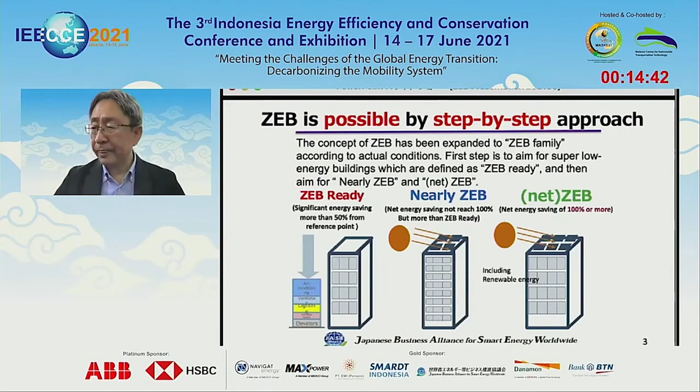In order to promote awareness raising and sharing of experience and know-how on ZEB in ASEAN countries, we have been conducting several activities. Our organization supports those activities, and it consists of public sector and private sector members. Since 2017, we have invited people from ASEAN countries to Japan for a training program about ZEB.

Since last year, we are organizing online seminars because of the COVID-19 pandemic. We have activities in Vietnam, Malaysia, and Indonesia also.

And in Japan, in order to promote ZEB, we published pamphlets and design guidelines. And in order to share knowledge and know-how, the ZEB design guideline in English is also available. If you want to see our pamphlet or guideline, we have an English version translated from Japanese, but it might be your reference.

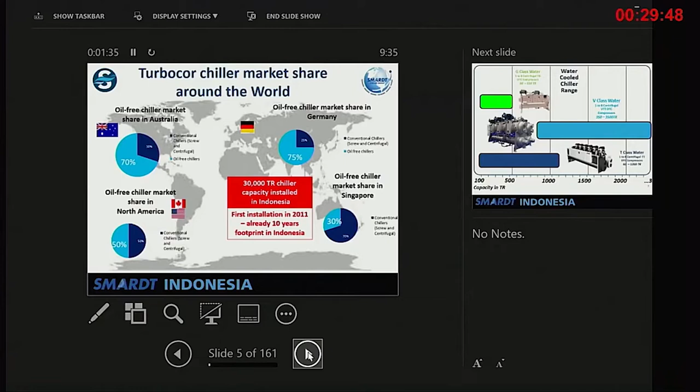The global market share of Turbocor oil-free chillers has increased dramatically, predominantly due to the efficiency that they provide. The product range of the chillers is continuing to grow, with larger and larger chillers available as oil-free chillers. We also now offer these models with low global warming or no global warming potential refrigerant, which is becoming increasingly an issue with Kigali now in place.

Water-cooled chillers, typically, you will find have multiple compressors if they are from SMARDT, if they are oil-free, whereas conventional chillers have only one large compressor. This, besides the energy efficiency, provides one of the key advantages for our chillers. Since the compressor is the one critical part on a chiller, having multiple compressors simply gives you redundancy, as well as the ability to unload into low loads, so more operational flexibility, which is very, very important.

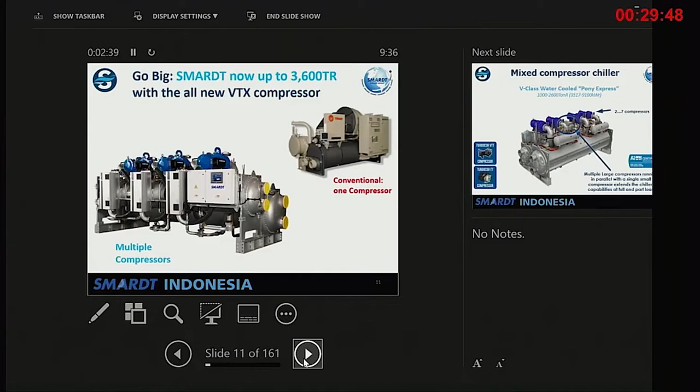What we also do, which is quite unique, is we can mix our various compressors on one single chiller to provide a very specific machine for your load requirement. Typically, this means that we add one small compressor to a large compressor chiller to be able to achieve very low loads or bridge gaps in our performance profile with this particular compressor type.

We also offer air-cooled chillers. I am actually very supportive and pushing air-cooled chillers, especially in the Indonesian market, because despite the general acceptance that in Indonesia one should use water-cooled chillers, the efficiency of our air-cooled chillers is really fantastic, because Indonesia's climate isn't actually as hot as many people imagine.

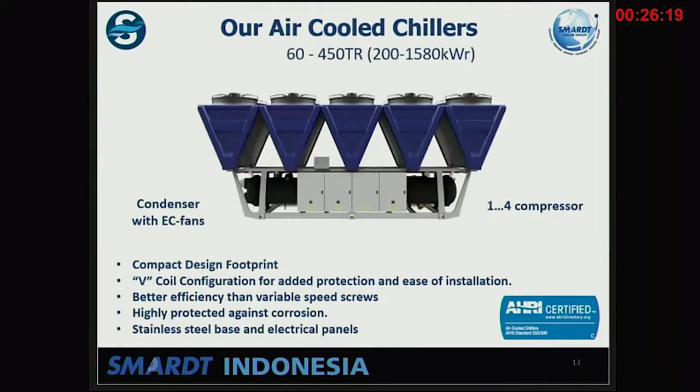As such the performance is very good, and you get rid of all your water-related problems. Specifically on this issue, we'll be hosting a virtual plant tour right after this presentation at 10 o'clock, where we present our chiller plant retrofit replacement project at the L'Oreal facility in Jababeka, East Jakarta, where we replaced a water-cooled chiller plant with air-cooled chillers, and found that not only have we saved the plant 20% of its total water consumption, because cooling towers used for water-cooled chillers are very water consuming, but also save them energy, changing from water-cooled chiller plants to an air-cooled chiller plant.

So our air-cooled chillers are really fantastic machines. We see a lot of interest in air-cooled chillers now, especially from data centers, which do recognize that water supply is a major issue. And as they do very detailed energy modeling, they also realize that the energy penalty supposedly for air-cooled chillers isn't actually that high at all with our oil-free air-cooled chillers.

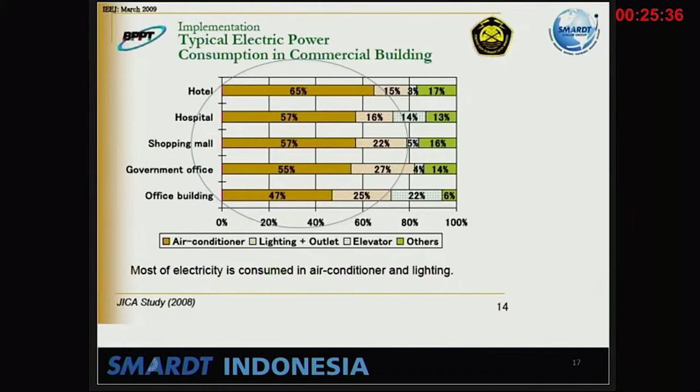Now, in Indonesia, why are we at this energy efficiency conference with chillers? Well, because cooling is by far the largest single electricity consumer of buildings in tropical climates like Indonesia. In a typical building, you can simply say that some 60% of the total electricity consumption is the HVAC system. And of that 60%, the vast majority, 80%, is the chiller itself.

PLN electricity prices have increased since we've entered the market, and as such, electricity bills are a concern to customers. We have seen quite a bit of interest in saving electricity, and typically this means with a smart chiller plant, with an optimized chiller plant, you can reduce your total electricity bill by 20 to 30% of the total bill.

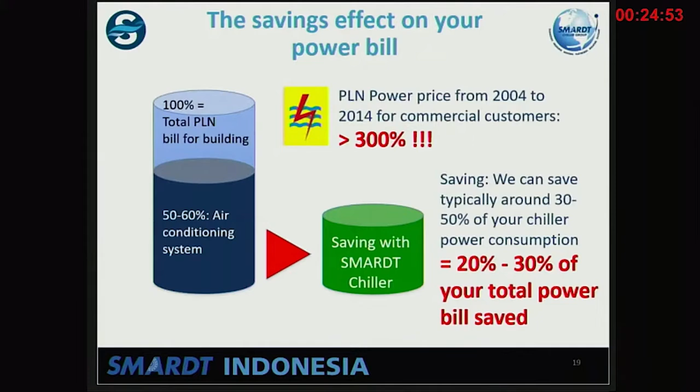What is important, as with most energy efficiency technologies, the initial cost is just a small part of the picture. Yes, our chillers are slightly more expensive, simply because we have multiple compressors on the machines. As such, we cannot offer the same prices as machines with just one compressor. However, the operating life of a chiller isn't 3, 4 or 5 years, it's 20 years.

So over this very long operating life, the efficiency advantage far outstrips the disadvantage of a slightly higher capex. And overall, we'll see typically paybacks or break-even points at some 1 to 3 years, and return on investments often over 1,000%. So energy efficiency with SMARDT chillers is one of the best investments anyone can make, especially in these times of tight markets, of economic downturns due to COVID.

Energy is something you consume in any case. A chiller is something you need to use in any case. This is a certain way to improve your profitability.

Now, I'm going to talk a little bit about the specific load profile where the SMARDT chiller is very appropriate to use. What is important to remember for cooling loads for buildings is that they are critical, right? Critical cooling load means that the equipment needs to be sufficiently large to cool your building for the worst case condition.

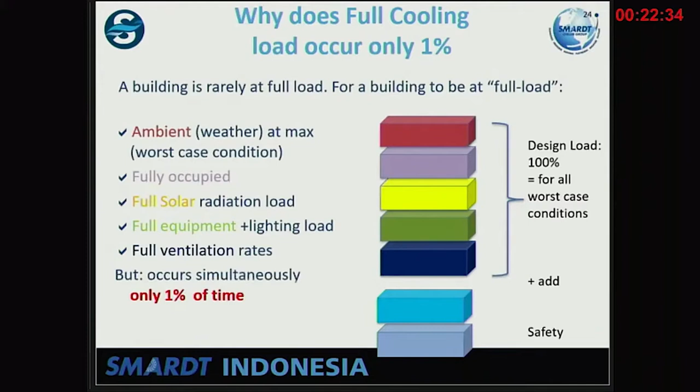The worst case condition is full sunshine on the hottest wet bulb day of the year, and full occupation, which means full ventilation rates, full internal equipment running, and on top of that, backup and safety factors. So all of this leads to a large block of potential cooling demands, which, however, occurs only very rarely together, because all these factors together happen maybe 1% of the time. So your design load is a maximum cooling load that you hardly ever need to reach.

What does it mean for the chillers? For the chillers, it means that your chillers will typically run in partial load. Not at 100%, but the vast majority of the time they run in partial loads. This is important because that means your machine needs to be efficient at partial loads, because that's where you use it 90% of the time.

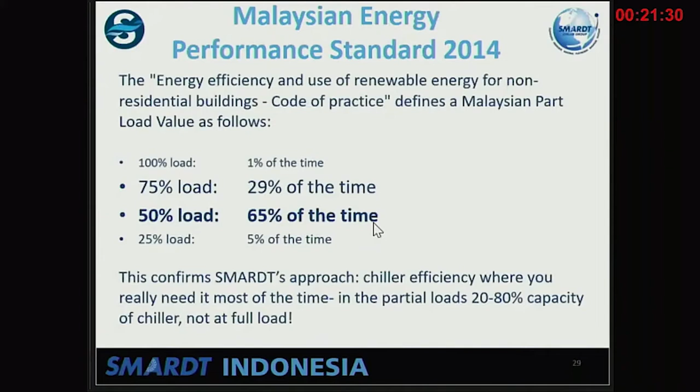However, most chillers are designed exactly the opposite way around. The Malaysian Energy Performance Standard, already issued in 2014, recognizes this very much. It actually says 50% load, as in partial load, will occur 65% of the time. So what they're wanting to say with this is look at the efficiency of chillers at these load points, not at 100% load points. And here with the efficiency curve of the SMARDT chiller, you can see that our efficiency is actually improving the more we unload the chiller.

So at 100%, our efficiency is good, but it's not necessarily better than a conventional chiller. But where we have a significant efficiency advantage is in these partial loads, and this is where you operate most of the time.

Here is a classic comparison with a conventional chiller. You see at 100%, we're quite similar. Then conventional chillers become slightly more efficient to about 80% and then quickly drop off to become less efficient in partial loads, simply because they have only one compressor, and that compressor cannot unload because it needs to maintain a certain compression ratio for the refrigerant.

Our advantage with multiple compressors is we can unload on multiple compressors. Each of the compressors has a VSD, and as such improve the efficiency down to very low loads. Typically, we can operate to at least 20% with improving efficiency, sometimes even lower.

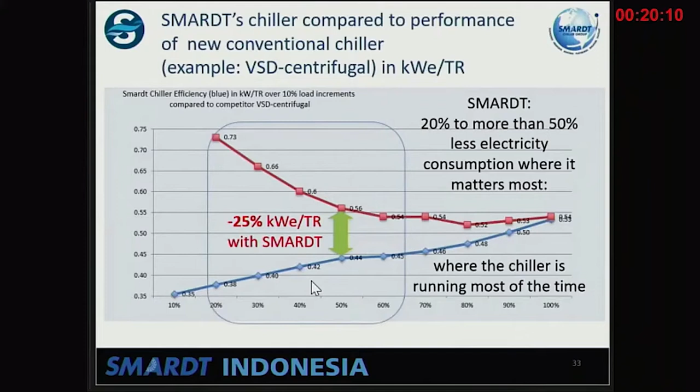The same characteristics, because we use the same compressors, applies also to air-cooled chillers, except that our efficiency advantage on the air-cooled chiller side is even larger.

So you will see here one of our air-cooled chiller plants that has been operating at a resort, a nice 24-hour operation. You see during the day, the efficiency increases slightly to about 0.8. During the night, it improves as low as 0.55, even 0.5. Average efficiency with an air-cooled chiller, 0.65 kilowatt per TR. That is quite unheard of for conventional air-cooled chillers.

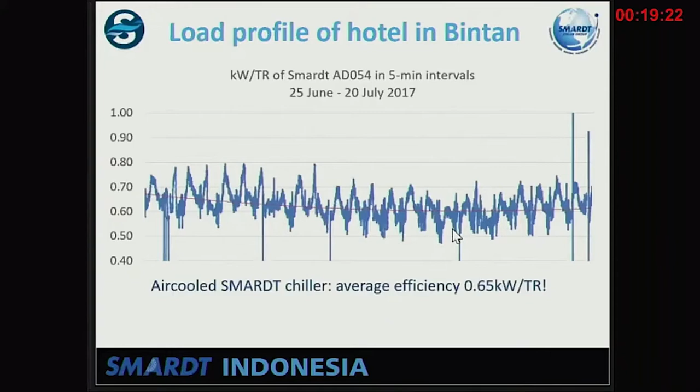Another case study is replacement. This was one exactly at a brewery in Singapore. We had very nice data of the old chiller in red. You see the data points. Very classic confirmation of the efficiency curve for conventional chiller. The more we look into the part load, the worse the efficiency becomes. Look at these efficiencies for the water-cooled chiller. Goes up to 1.6 for part loads, whereas the new SMARDT chiller in green, as projected, the efficiencies improve in the partial loads, overall a 40% efficiency improvement.

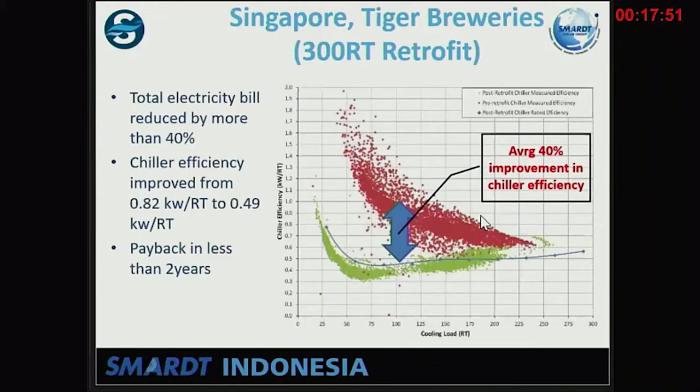As the second advantage of oil-free chillers, simply because we don't have any friction, we don't have any oil in the system, it's much more reliable and has reduced maintenance requirements. And because chillers are very, very heavy-duty machines, this is a very important aspect. Your chiller will run every minute that you open your building, your factory, your chiller will be running. So in many cases, 24/7, 365 days a year. A very heavy-duty machine with the according, typically maintenance requirements.

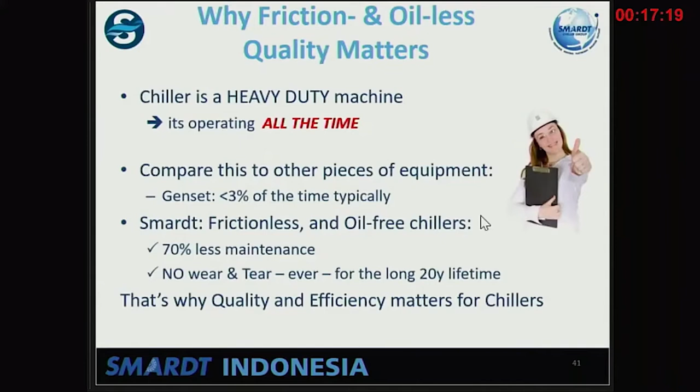However, with our magnetic bearing system, since there is no touch, there is no friction, there is virtually no replacement part on a scheduled basis, meaning there are no consumables at all. Whereas with a conventional chiller, you have to change the oil, you need to do oil checks, you need to change the filters, you have a lot of downtime, you have a lot of costs associated with it, and yet still a high risk of something breaking badly because of the inherent friction of the system.

The other advantage that I touched already on is the multi-compressor setup offers you redundancy. Why is redundancy important? Well, think about airplanes. If you fly over the Pacific to America, would you choose a one propeller machine, or would you feel more comfortable in a plane with 4 turbines? I think most agree that we all feel more comfortable in a plane with several turbines, because we know even if one fails, I have the remaining turbines to fly in. It is exactly the same scenario with the chillers.

The conventional chiller has one compressor. If that compressor fails, the whole chiller is out. With the SMARDT chiller, if one compressor fails, well, we still have the remaining compressors and we've only lost a little bit of capacity.

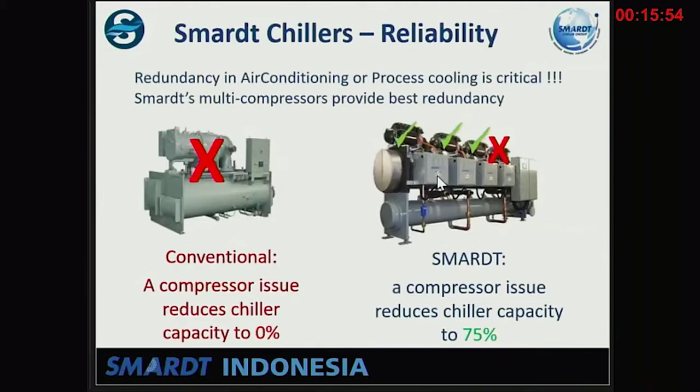We actually have isolation valves on all the compressor refrigerant pipes, and we can even change the compressor while the machine is still running, which is another significant maintenance advantage for critical operations.

This characteristic really allows you to reduce the number of chillers that you install. We are probably the only chiller manufacturer who goes to a client and asks you to buy less chillers. Please consider buying less chillers because you don't need so many. A, our chillers are more reliable. B, they have more compressors. C, you don't need a baby chiller because our chiller can unload into very partial loads, low loads. And as such, you will need less chillers.

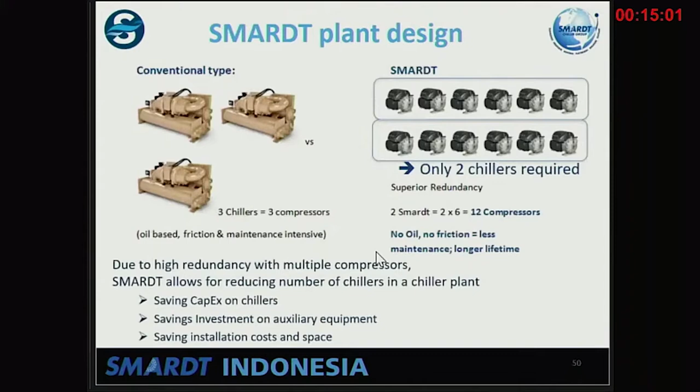Every chiller that you save saves you a lot of money because it saves you what we call auxiliary equipment. Every chiller that is there, as small as it is, needs pumps, needs a cooling tower, needs the accessories of the installation like valves and so forth. Very important electrical capacity that you need to add, including the expensive cabling, space, and the yearly maintenance cost.

So reducing the number of chillers is the number one strategy that we can apply to help you reduce the capex of the chiller plant, and in the long run, yet still be more efficient.

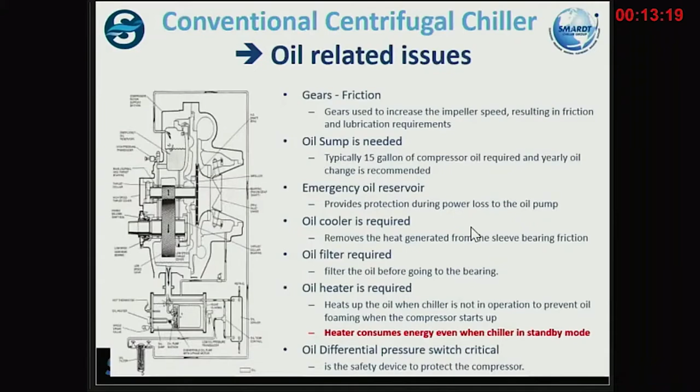The oil cycle in a conventional chiller is really quite a complex undertaking. With Smardt, you don't need to undertake all these maintenance steps on the chiller. In the field, we have seen typically a 70% reduction of maintenance issues, and as such cost reductions, not to mention the associated downtimes. The cost of lubricant is also very high because typically you have to buy it from the supply of the chillers, so a significant advantage there.

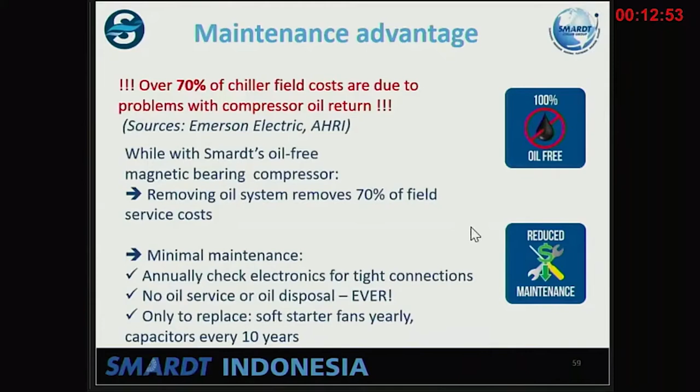Ease of service in small plant rooms can be quite an issue. You see how small our compressors are. Here's one of our technicians working on one open compressor. It is only 120 kilos, so light that actually 4 men can lift it anywhere. It has no oil inside, so it can fly. It is allowed to be airlifted, which means I can get a compressor very, very quickly anywhere.

Whereas conventional compressors are very heavy, several tons. They cannot be airlifted. It is really complex to take them out, to maintain them, simply because of their sheer size and weight.

Another case study in Alexandra Point in Singapore, where the client actually agreed to reduce the number of chillers from originally 4 chillers to just 2 Smardt chillers. So they indeed took up that Smardt chiller plant strategy. The incremental payback on this project was 14 months. In 14 months, break-even was reached. Very, very significant financial benefits from this strategy.

Last aspect I want to mention that is related to oil in the system that a lot of people aren't aware of. Lubricant in a conventional chiller will contaminate your refrigerant. Why? Because the lubricant sits in the compressor, and that is where the refrigerant goes through. Every time the refrigerant goes through the system, it will take tiny amounts of oil, which then will contaminate the outside of your tubes and create a slick film around it, which reduces the heat exchange capacity of those tubes. And because it sits on the outside of the tubes, you cannot simply clean those.

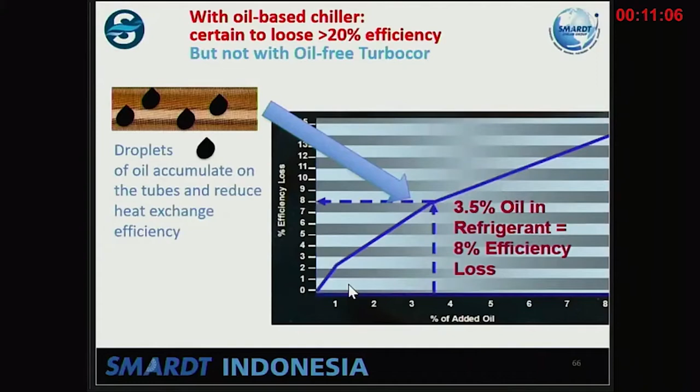ASHRAE's study found that your average chiller had lost 22% efficiency due to this oil issue. With a Smardt chiller, you simply don't have this issue ever. Whereas with a conventional chiller, you buy a machine that you know will become less efficient over time, with a lifetime of 20 years. Why would you buy a machine you know is becoming less efficient, that you have to keep for 20 years, if you can have an oil-free machine that won't suffer from this oil contamination?

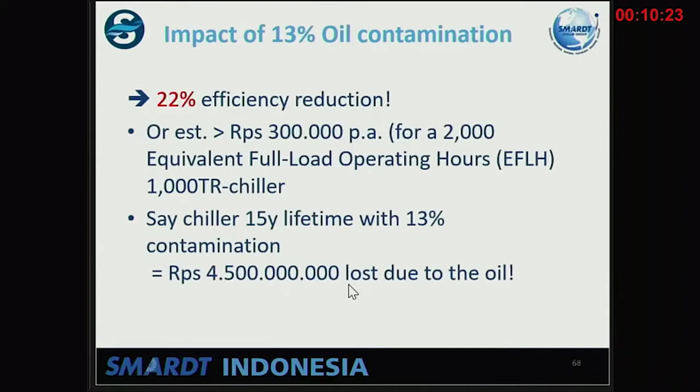This advantage alone of not suffering from oil efficiency loss already pays for the Smardt chiller's slightly higher capex. A couple of other advantages: we have built-in soft starters, fast restart options that can restart the chiller as quickly as 20 seconds, and absolutely no vibration because there is no friction. We typically have the lowest noise of any chillers, and very important, if you're building a new building, our weight is always significantly lower, and the size of our chiller is typically lower than conventional ones.

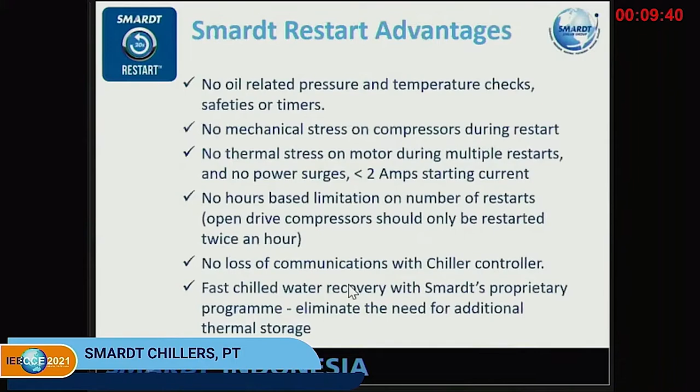Now, I see we have 5 minutes left, so I will jump through these slides quickly to give a little introduction to our CPECS system, our chiller plant optimization controller. A very important aspect to understand: a simple example - even if you buy a race car, say a Lamborghini, top of the line, but put an inexperienced driver in it, you will simply not win any race.

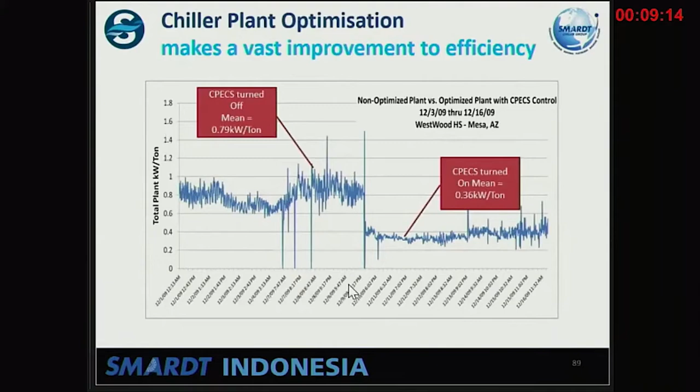It's very similar with the chiller plant. You can buy the Smardt chiller, but if you don't have an optimization controller, the chiller system is a complex system with several chillers having multiple pumps, cooling towers, and so forth. Now, who knows how to run this equipment in harmony with each other at every single minute of operation? No one. The human operator cannot do this quickly enough.

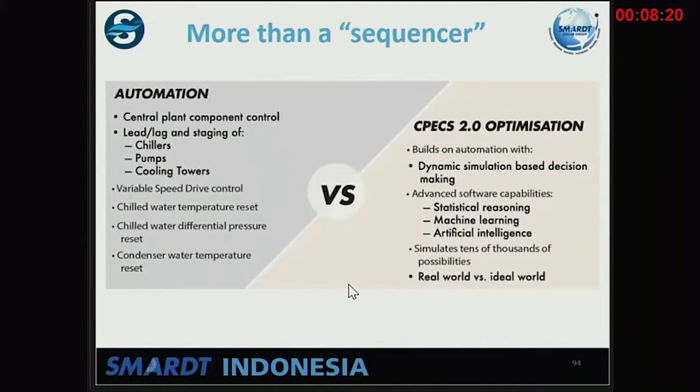So what you need is plant automation, and in an ideal case this is an optimization system, programmed with the characteristics of each piece of equipment to calculate at every single second of operation the most optimal way to run each component of the chiller plant in harmony with the others. The effect: you can save as much as 50% additionally on your energy cost. Your chiller plant will only truly reach the specified top efficiencies of the equipment if you have such an integrated chiller plant controller. Only with such equipment can we really guarantee the best efficiencies, such as 0.55 kilowatt per TR for a water cooled chiller plant.

So a very big impact of CPECS. It is more than a sequence controller. A sequence controller will not get you there.

I have just a few minutes left, so I'm skipping quite a few slides to give a last summary of the advantages of Smardt chillers. Smardt chillers are 100% oil-free. There's no oil-related maintenance cost, and no oil-related equipment at all that can break. We have no frictional losses, and as such the highest efficiency.

We have a very long service life because there's no friction, no startup currents, no noise, no vibration, and most importantly, multiple compressors, which give you the efficiency where you truly need it, the ability to reduce the number of chillers you need to purchase, and the redundancy to feel safe that even if one compressor should fail, it will not impact your operation, because chillers are critical pieces of equipment.

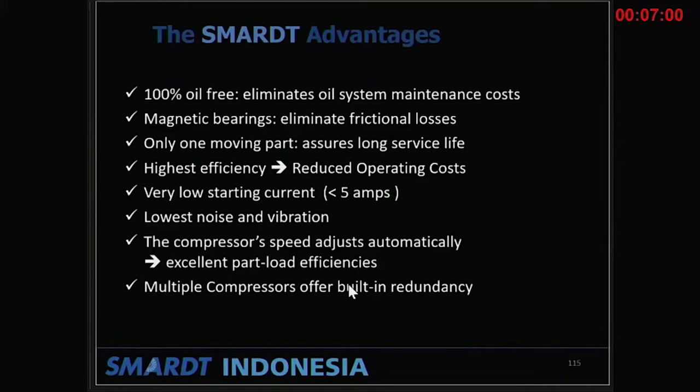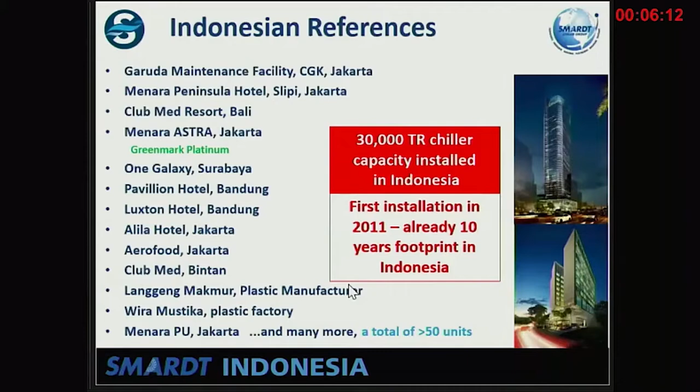Our largest air-cooled chiller plant so far has been in operation since the beginning of this year in Pontianak, with almost 1,500 TR. So it is very likely the largest magnetic bearing air-cooled chiller plant in Indonesia at this stage. We see a lot more interest in these. I invite you to join us for the virtual plant tour we are hosting in just a few minutes, which will show you our air-cooled chiller plant at the L'Oreal industrial facility.

The global setup of SMARDT is with 6 factories around the world at this stage. Typically, our customers in Indonesia choose the Australian factory or the Chinese factory. Our regional Asia office is in Singapore, where we also have a large spare parts warehouse, and obviously we have skilled technicians and the according tools in Indonesia.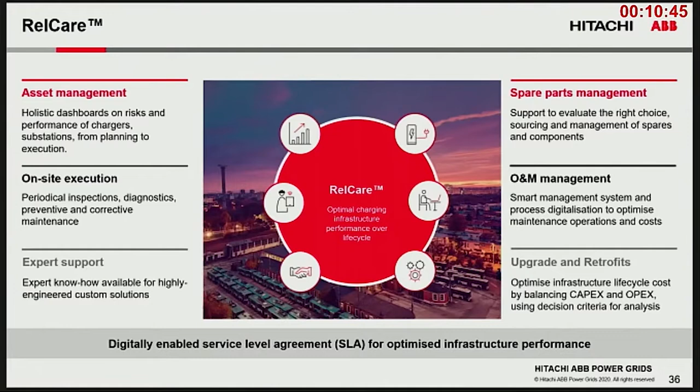Mungkin dari sini ada yang ingin ditanyakan.

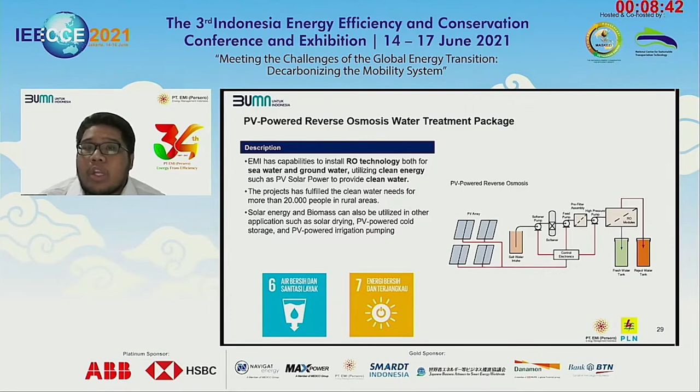Ini beberapa contoh proyek-proyek CSR untuk reverse osmosis atau water treatment plant untuk menyediakan air bersih baik di Kepulauan Seribu, di Nusa Penida, di Universitas Sriwijaya, dan di Semarang. Contoh yang di Nusa Penida merupakan...

PV powered seawater reverse osmosis untuk menyediakan air bersih dari air laut.

Pemanfaatan solar energy ini sendiri bisa dikembangkan ke berbagai aplikasi lainnya, seperti solar drying yang sudah pernah kami lakukan di Pulau Nusa Penida di Bali, PV powered cold storage atau cold storage menggunakan energi matahari, di mana kami telah berpengalaman dalam membangun cold storage di 2 tempat, yaitu di Brondong dan di Rembang, serta PV powered irrigation pumping.

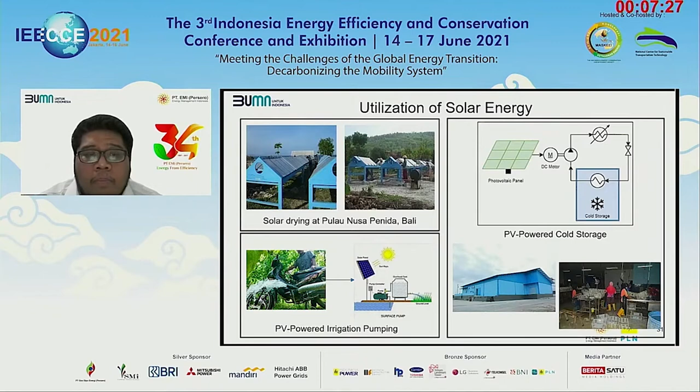Demikian presentasi dari saya. Silakan apabila ada pertanyaan.

Oke, baik. Terima kasih, Pak Bramantio. Baik, untuk para peserta mungkin yang ingin bertanya. Oke, ini ada satu pertanyaan, Pak, dari Dimas Pramestu. Pertanyaannya adalah, EMI sebagai perusahaan manajemen energi, apakah juga mengerjakan proyek-proyek terkait manajemen energi di gedung, atau hanya di industri saja?

Silakan, Pak. Ya, bisa kami sampaikan bahwa kami juga memiliki pengalaman untuk energy audit di gedung. Kami telah melakukan di gedung-gedung pemerintah dan gedung-gedung BUMN seperti PGN, serta kami juga memasang energy monitoring system di gedung tersebut.

Energy monitoring system ini adalah sistem yang bisa memantau penggunaan energi secara real time dan ditampilkan pada sebuah dashboard, yang bisa diakses baik melalui browser internet atau web-based maupun melalui aplikasi Android. Dan hasilnya ini nanti bisa digunakan untuk membuat perencanaan energi dari gedung-gedung tersebut.

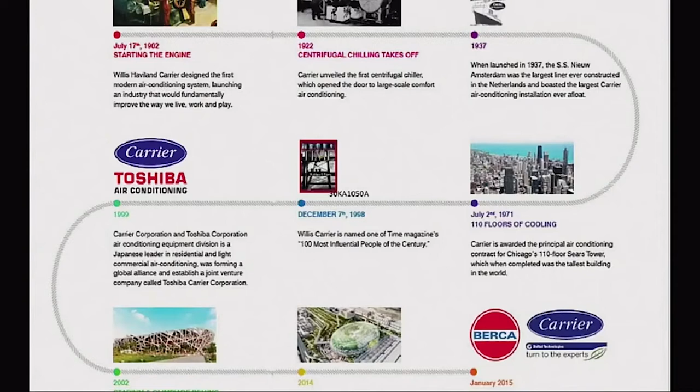Selanjutnya kita juga ada joint venture sama Toshiba, dan Toshiba khusus untuk inverter air conditioning system. Jadi Toshiba adalah inventor of inverter air conditioning.

Carrier adalah inventor modern air conditioning. Jadi kedua-dua inventor ini gabung untuk memberikan solusi yang terbaik ke customer di Indonesia.

Sedikit tentang visi dan misi company kita. PT Berca Carrier Indonesia adalah joint venture antara PT Berca Indonesia dan Carrier Corporation dari USA.

Visi kita adalah untuk make Indonesia a better place to live. Dan mission kita adalah untuk menjadi first choice of air conditioning solution di Indonesia.

Kita ada head office di PRJ, Kemayoran. Dan kita juga ada service and part center di Sunter dan branch di Surabaya.

Ini perkenalan lagi tentang Willis Carrier, inventor of modern air conditioning. Dia solve one of mankind's elusive challenges dengan mengontrol indoor environment melalui modern air conditioning.

Dan juga dari Time Magazine, dia masuk 100 most influential people.

Ini Toshiba Carrier Corporation, joint venture antara Toshiba dan Carrier untuk produk khusus inverter, buat Indonesia dan seluruh dunia. Ini Global Alliance dari tahun 1999.

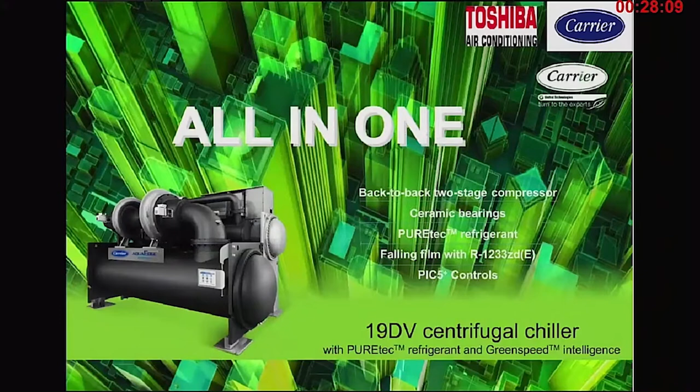Sekarang saya mau sedikit bahas tentang 19DV. Ini adalah ceramic bearing, paling efficient chiller di dunia menurut kita. Ini back-to-back two-stage compressor dengan PUREtec refrigerant.

Nanti saya juga akan bahas tentang PUREtec dan refrigerant HFO, dan intelligent controls.

Sebelum kita mulai tentang chiller, saya mau sedikit diskusi dan bahas tentang beban listrik. Untuk company kita, penting banget untuk bisa membantu building menurunkan beban listrik.

Kalau kita lihat seluruh gedung, beban listrik paling besar adalah dari AC, dari chiller, hampir 45%. Air side, AHU, adalah 15%.

Jadi kalau kita gabung chiller sama air side, hampir 60% beban dari HVAC. Ini kenapa HVAC penting, 60% beban biaya dari operation adalah tentang HVAC.

Dan juga ada 27% dari lighting yang konsumsi energinya rendah. Jadinya kenapa hari ini saya mau bahas tentang chiller 19DV ceramic bearing.

Soalnya menurut saya ini bisa membantu menurunkan biaya listrik untuk semua gedung.

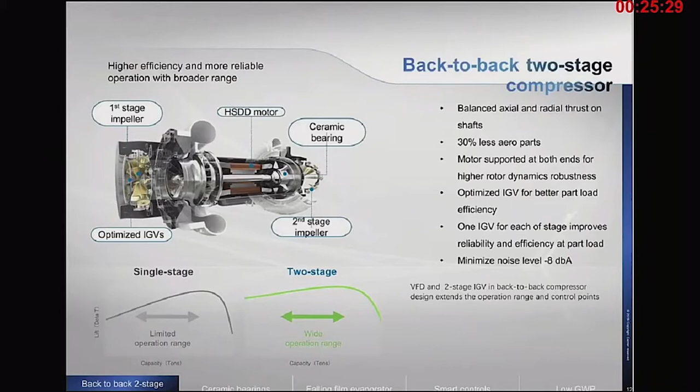Dan core technology-nya apa? Core technology-nya adalah ceramic bearing. Ceramic bearing ini membuat chiller menjadi oil free, dengan refrigerant lubricated bearing system.

Ini lebih kuat, lebih reliable, tidak ada risk of oil leakage, dan juga improved heat transfer. Jadinya ceramic bearing ini adalah teknologi chiller paling efficient di dunia dari Carrier.

Saya juga mau sedikit bahas tentang refrigerant dan falling film evaporator. Kenapa falling film evaporator di low pressure system lebih efficient? Why better heat transfer? Soalnya kalau ada falling film, artinya refrigerant dari atas ke bawah. Ini ada easy escape for vapor bubble dan no submerge effect. Dan unique structure minimize aero losses.

Jadi itu tiga alasan kenapa kita pilih falling film untuk better heat transfer efficiency. Dan kedua, refrigerant R1233zd(E). Ini refrigerant global warming potential-nya sekitar satu, artinya lebih efficient, low toxicity, dan gak punya impact untuk environment, untuk greenhouse global warming. Jadi ini 1233zd(E), refrigerant dari Carrier.

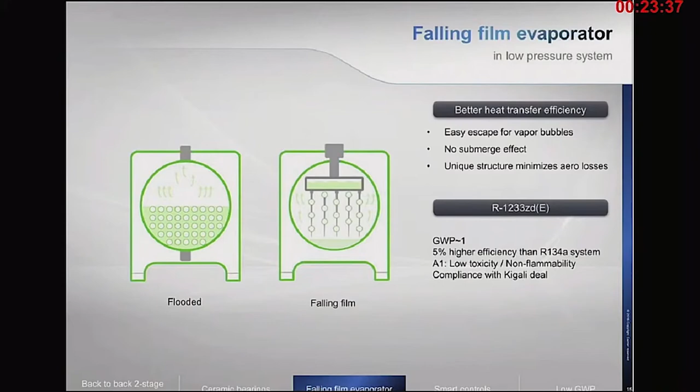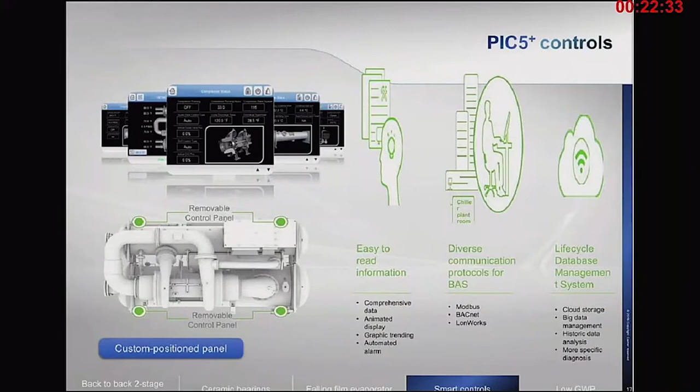Dan untuk di dunia digital kita punya smart PIC5+ controls. PIC5+ ada connection Modbus, BACnet, LonWorks, dan juga ada capability untuk internet, bisa di-remote access. Jadi kita bisa lihat leaving dan entering temperature dari remote. Ini touch panel, jadi PIC5+ control is the latest.

Kenapa chiller ini most effective buat data center? Adalah 30 second swift restart. Kadang-kadang ada listrik, power shutdown. Di dalam 30 detik, chiller bisa di-restart. Dan kalau kita lihat, dalam almost 95 detik, chiller bisa loading sampai 80%. Jadi dalam 2 menit, chiller bisa running back to 80%. Ini efektif banget buat data center pabrik.

Dan efisiensi. Yang sebelumnya saya jelasin kenapa efisiensi penting, karena 65% beban biaya listrik dari chiller. Dan 19DV ada solusi dari Advantage, ada Carrier i-Vu platform, ada chiller plant optimization untuk bisa hemat listrik.

Next, saya mau sedikit bahas tentang project reference. Project reference ini kenapa penting? Soalnya kita lihat banyak customer kita pilih ada repeat order. Kalau kita lihat Pondok Indah, ada 19DV, ada AHU, dan dia repeat lagi. Ciputra World Surabaya, ada 23XRV tri-rotor compressor, habis itu 19XR, habis itu 30XW.

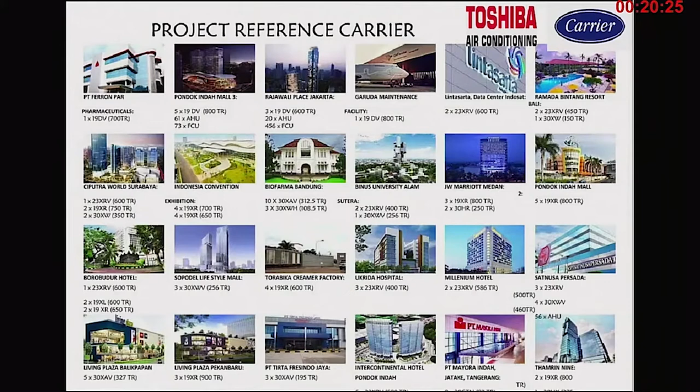Kita lihat Torabika, kita lihat Binus University. Semua customer adalah repeat customer buat Carrier. Untuk ini artinya apa? Artinya customer udah satisfied sama service kita, produk reliable, dan produknya membantu untuk hemat listrik.

Kita juga ada yang baru project di Podomoro City, Deli, Medan. Ini efisiensi chiller plant di dalam 0,6, menurut saya strong banget. Dan kita juga ada Southgate, kita juga punya produk, Living World, Alam Sutra, Ciputra World Surabaya, ada 4 unit 19DV, dan Pondok Indah Office. Ini semua project.

Beberapa project kita juga ada untuk VRF. Untuk VRF kita ada Toshiba. Toshiba adalah penemu inverter AC di dunia, jadi bisa invent inverter air conditioning. Kita lihat project seperti Distrik 8, Kensington, Living World, Jababeka, Taman Anggrek, Alpha Headquarter, Tunjungan Plaza Surabaya. Ini beberapa customer, repeat customer buat kita juga.

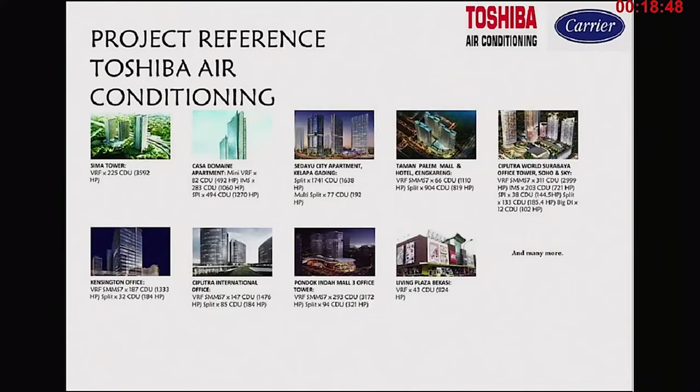Sedayu City Apartment, Casa Domaine di Sudirman, Ciputra World Surabaya, Kensington Office juga lagi tambah. Jadi semua project ini adalah buat kita loyal customer, kita membantu supply, design, and execute dari tim kita.

Ini kira-kira presentasi dari saya. Saya buka beberapa waktu untuk bisa tanya jawab, dan kita bisa connect sama customer juga.

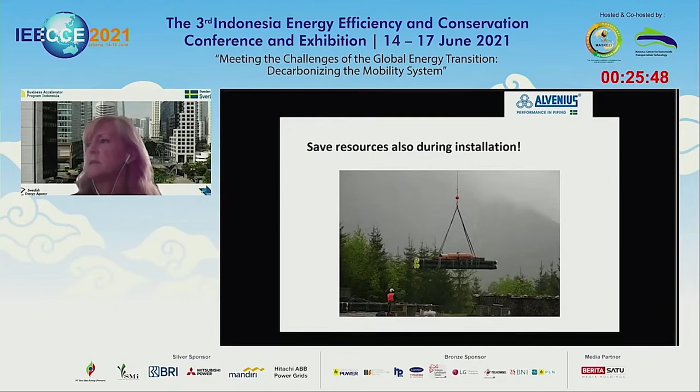Yes, this is our quick coupling system. All you really need is the pipe, a gasket, the couplings, and some nuts and bolts, as well as some mounting grease. And it really is that simple.

Another advantage with our piping system is that they're very easy to replace. If something were to happen, you just take the coupling off and pop the pipe out, as opposed to welded pipe where you actually need to cut and re-weld.

The full engagement of the housing of these couplings also withstands the pressure restraint and load capabilities. So any pipe movement will not break the coupling, or the coupling will make sure that it holds in place for any sorts of movements. I was thinking even in Indonesia, where there can be some small tremors happening from time to time.

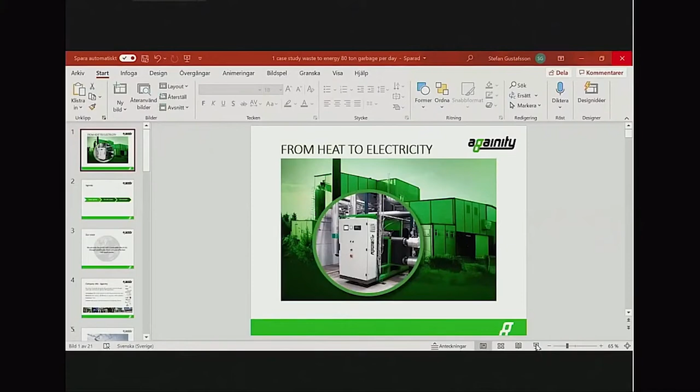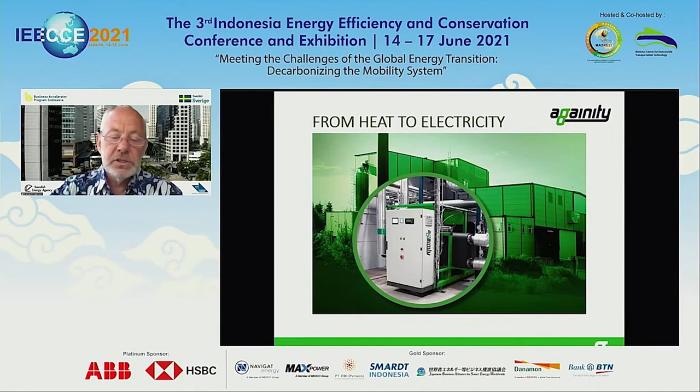My name is Stefan Gustafsson, and I'm responsible for Againity in Indonesia. I've been working in the energy sector for 35 years, starting from ABB, and the last 20 years I've been working in renewable energy. Now I'm working with Againity in Indonesia and India to help them develop the market.

Againity has a vision to work with sustainable electricity with small, medium scale, local overseas applications. Againity is a Swedish company which was established in 2013. We have 20 plus turbine references, more than 80,000 hours in operation, and 99% availability of production. The location of the headquarters is in Norrköping, 2 hours south of Stockholm.

When Againity started to develop this product, they were looking at the problem of not using medium and low temperature for heat, and how can we convert this waste heat into electricity. Basically, the ORC turbine is using hot water or steam or oil, high temperature oil, from 80 degrees up to 150 degrees, and from there we produce electricity.

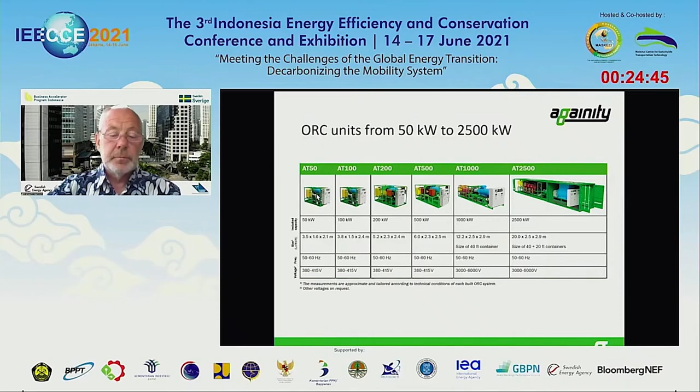This can also be standalone electricity production where you don't have a network or grid.

Reference installations are mostly in Sweden and in the Nordic countries, because here is our home market, and here we also developed the market and product. Starting from 2013 with the first installation, and now speeding up more and more installations in the Swedish market, but now also looking for the international market. This is really important for us. Most of these installations are made in community-based district heating systems, so the customers are the communities and larger cities. Waste is a big problem all over the world.

In Sweden, we decided many years ago, I think 30, 40 years ago, that we should burn this waste and take care of the heat and electricity, and clean the gases so we don't pollute the air. Huge land areas are consumed, and I know in Indonesia this is also a problem here. We have a lot of methane gas extracting up to the atmosphere, which is a big problem because methane gas is a very aggressive greenhouse gas. There are health consequences, and also burning problems.

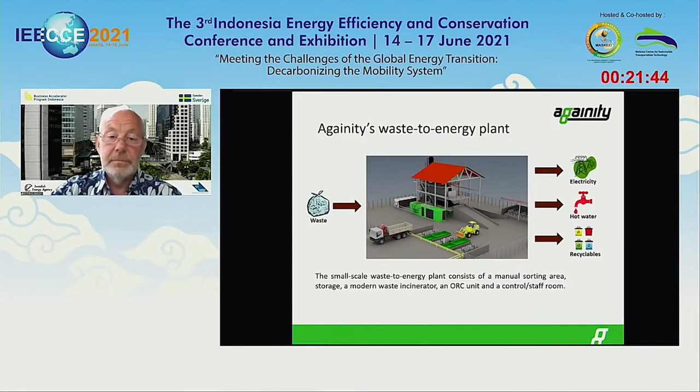This is the indoor design where you have everything built inside, or you can have an open installation. We have different sizes from 1.2 ton per hour and up to 5 ton per hour. And you can multiply this as many times as you want if you want to go larger size. But we believe this is for smaller installations, not for large installations.

This is a schematic diagram for the system, how it works with a boiler. And here is the local district heating, but it can also be the water production system. And the evaporator and condenser standard and a turbine.

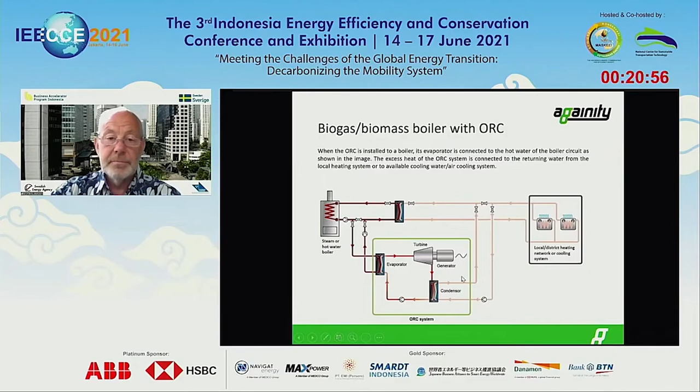Yes, this was the presentation for this. And then I also would like to show you a film.

Just trying to find it. Oh, I can't get the film to work.

Can you see it now? Yes, sir, you see the film? Yes, I see it.

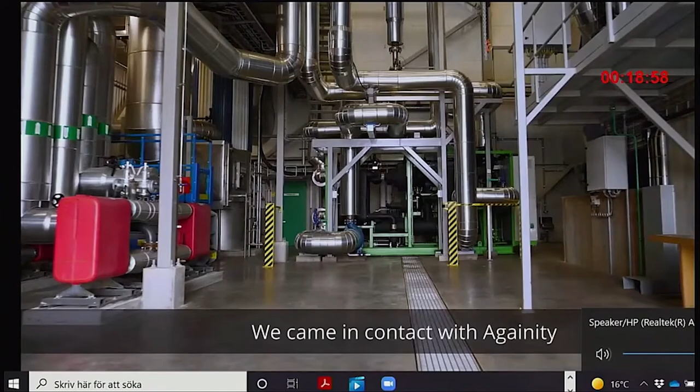Produce our own electricity as well. We came in contact with Againity and went to see a production plant up in Ronneby. They were really happy with their electricity production and proud of it. And that convinced us to invest in our own.

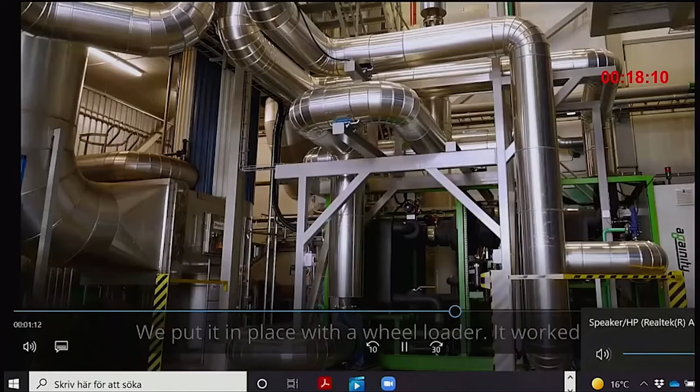It's a really good complement to the production plant we have, since when it's dark outside and it's cold outside, that's when we produce the most electricity, and that's when we have been running for about a year. Since we have seen the results, we can also honestly say that we're happy.

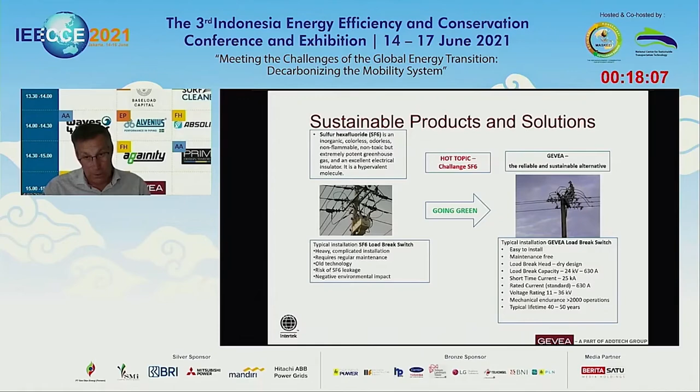At 24 kilovolts, for example, we can break 630 amps, and the short time current is 25 kA. The mechanical endurance is more than 2,000 operations, and as I said before, our products are typically used for 40 to 50 years.

So what are we doing then? We have a range of standard products within electrical distribution. It's a modular building system, as you will see, a lot of customized products and solutions, and our products are well known to the market as easy to install, low weight designs, and minimal maintenance requirements.

Just to show you a few examples that we are capable of making customized solutions of our standard products. Just three examples, going from overhead line to earth cable or ground cable, for example.

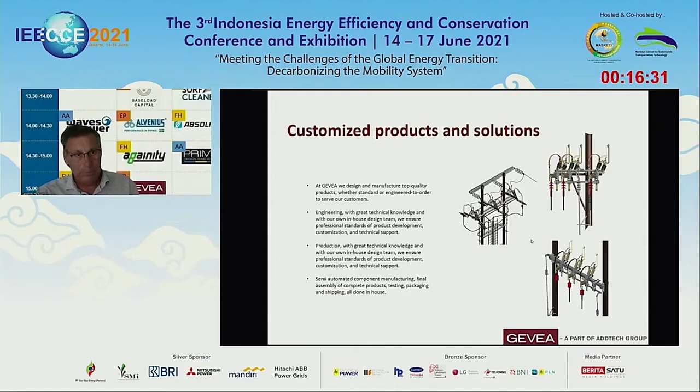What is low pressure? It's a kind of low pressure in the contact, which is also a key feature for being reliable over the years. In closed position, the switch could remain closed for many years without operation, and when coming back, you want to be sure that it's easy to open, or that it's possible to open. With our technology, we have seen that it's very reliable in that case - it's not stuck in closed position.

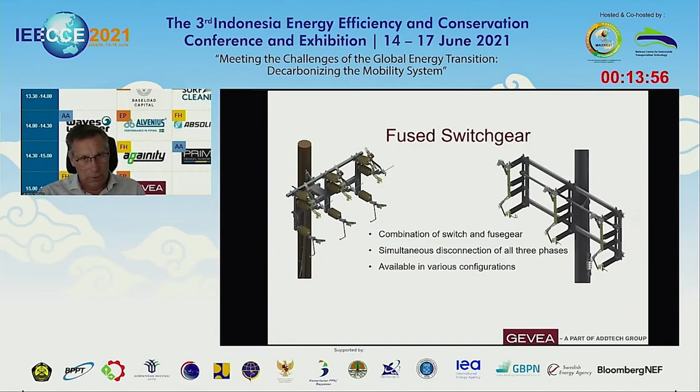We can also combine our switches with a fuse arrangement, so you have a combined fused switch here in different shapes. We do have pure fuse arrangements of different kinds, also in combination with surge arresters, for instance.

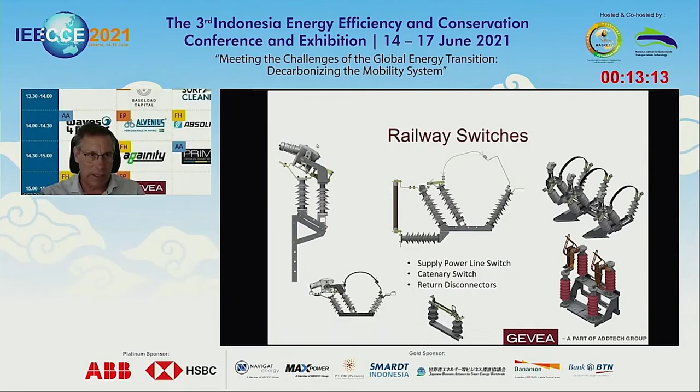The railway program of products we supply today includes power line switches, catenary switches, and return disconnectors. As I said before, these products are based very much on the product range for electrical distribution, but of course on that market we see some other requirements - for instance, a breaking capacity up to 2,500 amps, and fuse arrangements also for railway applications.

So what I would like to convey, my message today, is that within our niche, within electrical distribution up to 52 kilovolts, we are a leading and worldwide known supplier of products and solutions within air break switches and fuse arrangements.

We do have all the sales, design, and production at the same location in Norrköping, Sweden. Our products are produced in-house. We have a long experience of export sales and logistics services.

What is important when you have remote business is to have a strong local representative. Our aim is to have both a commercial and technical capable partner, giving customers in the specific country logistic solutions, but also providing local content, which means in our cases having the final assembly and adding some of the mounting accessories on a local basis. In Indonesia, we are cooperating with a company called PT Sikamindo, a part of the Sikam group.